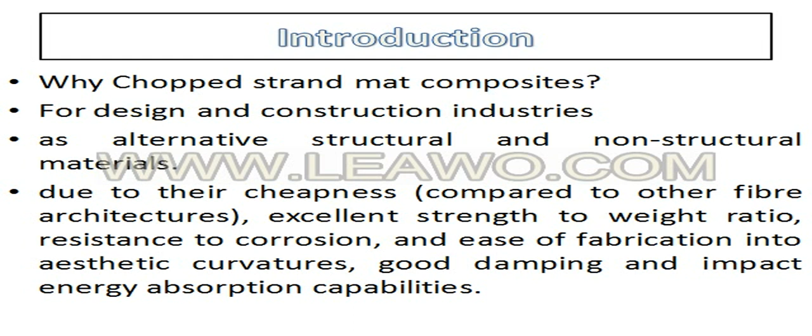Then we look at the knowledge gap and the justification for the study. Knowledge gap in the literature: it is apparent that mat composites have received less attention compared to other fiber architectures in its modeling, despite wide application. Therefore, this experimental research work is used to model the tensile strength and modulus of the chopped strand mat composites needed during design.

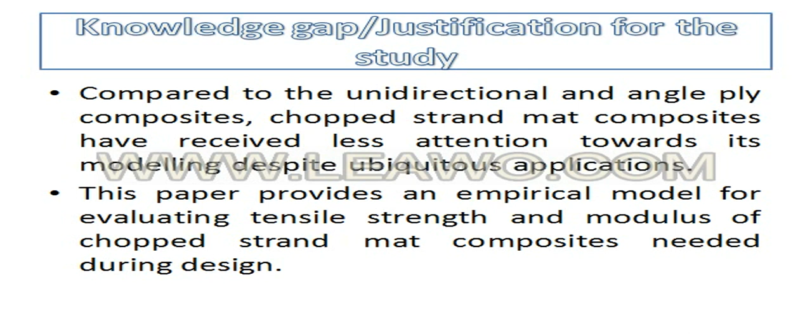In the literature, there are models developed based on rule of mixtures and modified rule of mixtures, incorporating one factor or the other. They are basically developed from the mechanical properties of the constituents.

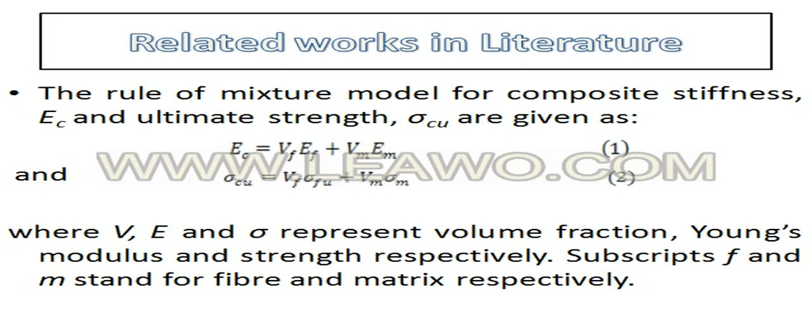Cox and Krenchel incorporate fiber orientation, η0, and fiber length efficiency factor, ηLE, in the stiffness model, while Kelly and Tyson modify the strength with the same factors. That is fiber orientation and fiber length efficiency.

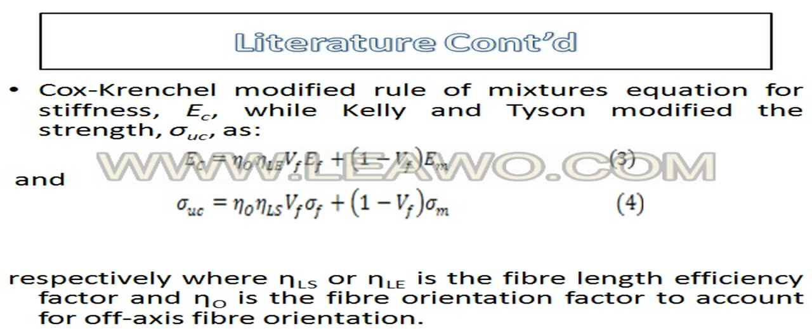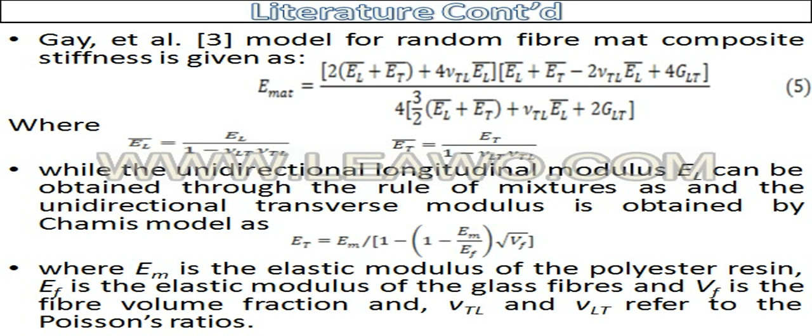Also, Gay developed a stiffness model of the mat composite using unidirectional parameters. This, if you look at it, it is a bit complex, and that's why we have decided also on a simpler methodology.

In our experimental modeling, we started by producing coupons. Materials used include e-glass chopped strand mat, unsaturated polyester resin. The catalyst is methyl ethyl ketone peroxide. The accelerator is cobalt.

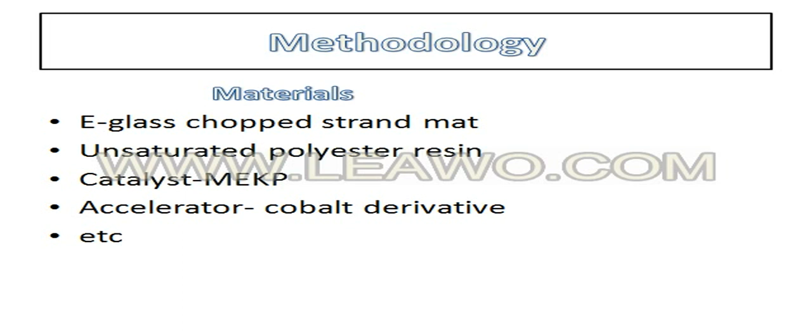The method used: coupons were produced using the hand lay-up technique. Tensile tests of the specimens were carried out according to ASTM, American Society for Testing and Materials, D638 standard for tensile properties of plastics.

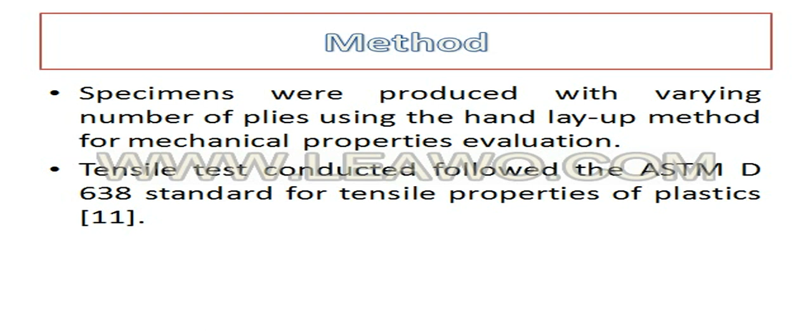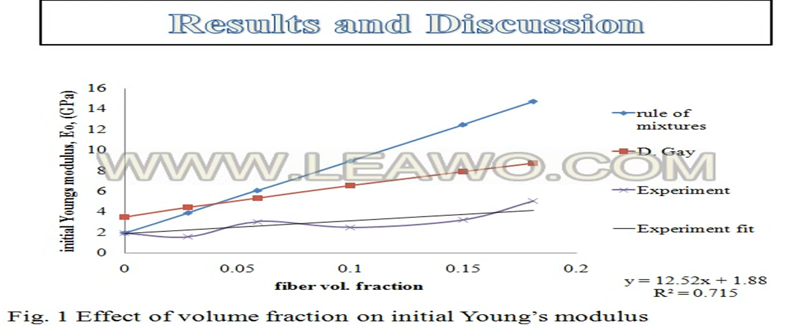Also, a linear model was developed, and this model, put in the form of an equation, is to compute the modulus of a fibre-mat composite knowing the constituent properties and the volume fraction.

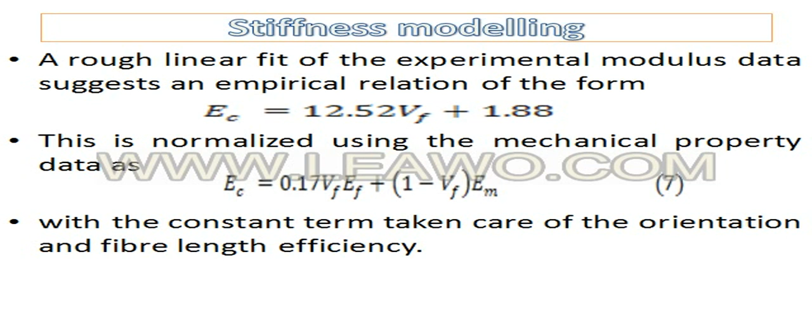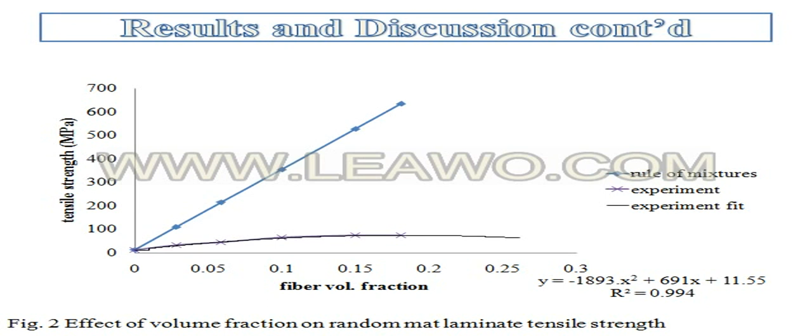Also, the tensile strength plotted against the fiber volume fraction yielded a quadratic model which is presented in equation 8. This model ensures that the strength decays above 20% fiber volume fraction. This is typical of a real fibre-mat composite.

If you look at the other models, they have a linear model with fiber volume fraction. This can be for unidirectional, yes, but for fiber mat, the orientation of the fibers is not in one direction. And when you start pulling them, some are not actually contributing, especially with the increases in fiber volume fraction and less binding. And so you start losing strength with more fiber volume fraction.